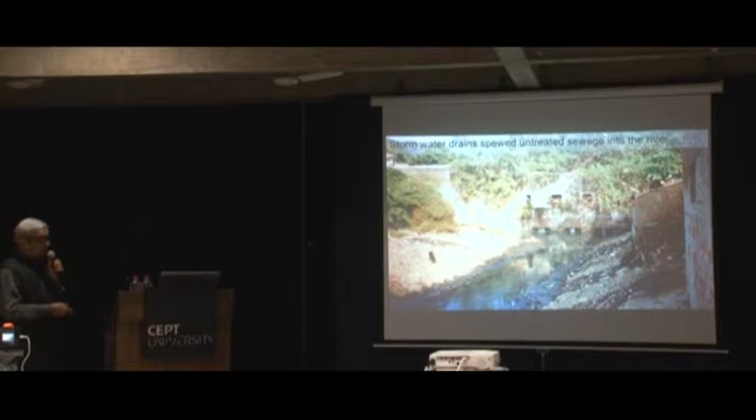You will see that the river banks are a place where the poor built their hutments along stormwater drains that brought along with the stormwater a lot of untreated sewage flowing down. The only places where people could enjoy the river from were the bridges, and in summer, a lot of people would promenade up and down the bridges, since that's the only place from which you could enjoy the expanse of the river.

By the end of the 20th century, the city had turned its back completely to the river. Here's a view of the riverfront the way it was. You have lots of activity, slums, washing, dyeing, a lot of sewage in the river. A bit of a mess here because of all that, and this is an artist's impression of the state.

Most Indian rivers are encroached upon by houses that poor people build and slums. Most Indian rivers are polluted, where industrial effluent is often put directly into rivers.

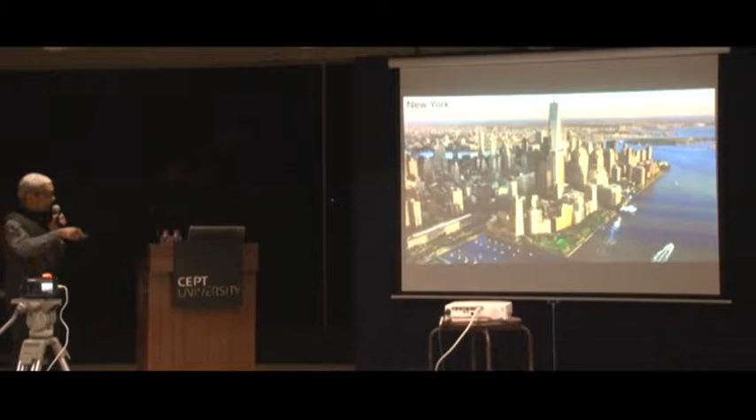But it has gardens like this along the way. Here's another view - you walk all along this and find lovely spots like this in the middle of the city where you can walk and quietly enjoy the sunset across the river. So that's a view from New York.

So it's not just the rich countries - we have our own Marine Drive in Mumbai, a fantastic waterfront. What would Mumbai be without that sort of waterfront? But what's important to remember is that these waterfronts did not always exist. Infrastructure was built, rivers were cleaned, and riverfronts were developed as meaningful public spaces.

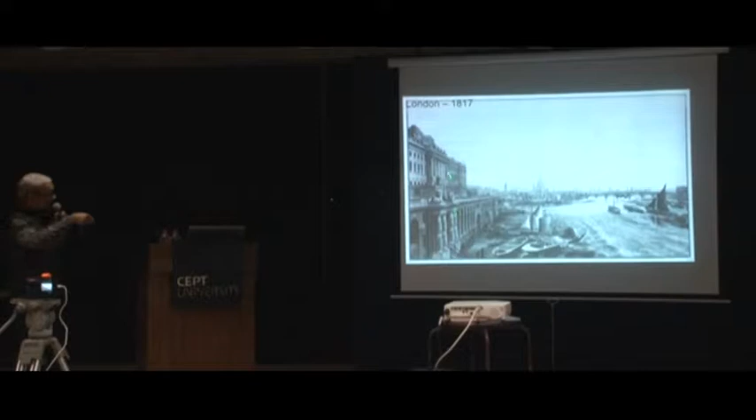You could take boats all the way in here, and the buildings used to be built so you could take boats directly in there. That's another view of Somerset House in 1870. By this time, London was already industrializing and starting to pollute its river.

Here's a cartoon from the 1830s, and this is what they are talking about: all the sewage coming into the river, the source of the waterworks for London polluted by all this. They used to say the water was so thick you could walk on the Thames. In 1858 the river got so polluted that they had to close down Parliament because you couldn't sit in there—the Parliament House is on the river—it was stinking so much they had to stop using it.

So this engineer called Bazalgette, who had already made plans for how some of these problems could be tackled, was pressed into action. He started building in Victorian times the interceptor sewers and the embankments that are used by London even today. Victorians were great city builders—they had these terrible cities you can read about in Charles Dickens and Karl Marx—but they started building infrastructure like this, interceptor sewers, subways and embankments, to transform their cities.

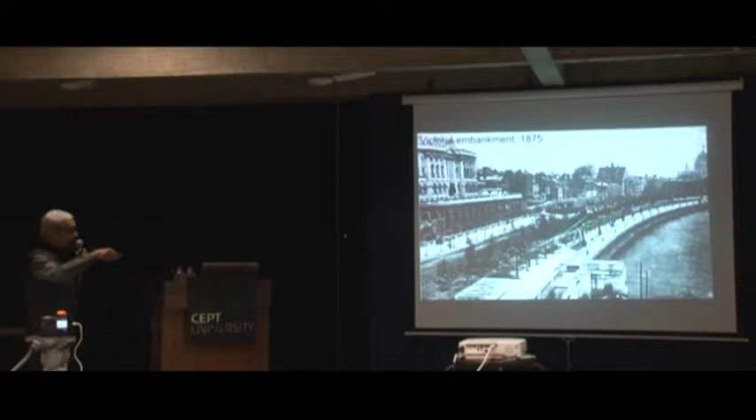Here you have Somerset House, and that's the embankment built here. Inside this embankment is an interceptor sewer that started taking the sewage away towards the treatment plant. Soon after 1875, trees started growing at Somerset House at the back there, and that's what the embankment looks like. Today, if you go to London, that's Somerset House, and that's the edge of the river at this point.

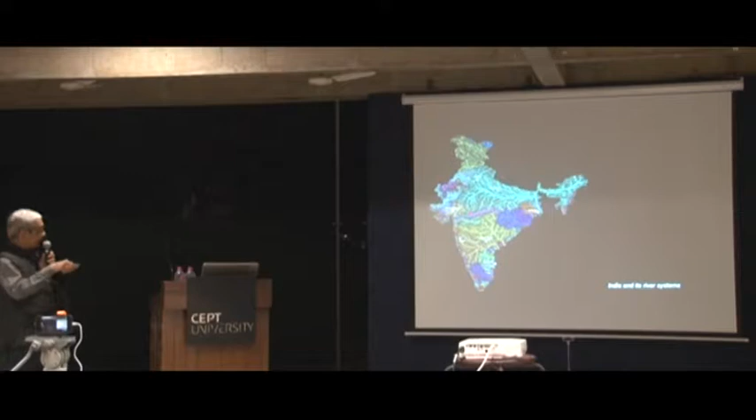That's Gujarat, and if you go a little closer, that's Gujarat, that's the Aravalli Hills, that's the Gulf of Khambhat, and that's the Sabarmati River. All the rainfall that falls in this area collects and gushes past Ahmedabad—that's the catchment area. All the rainfall in this area gushes past Ahmedabad and goes further down to empty into the Gulf of Khambhat.

In monsoon, Ahmedabad used to get severe floods—that's the 1973 flood. You can see the Nehru Bridge here, the State Bank building, the Apna Bazaar building, the Central Bank building, and the water was that high.

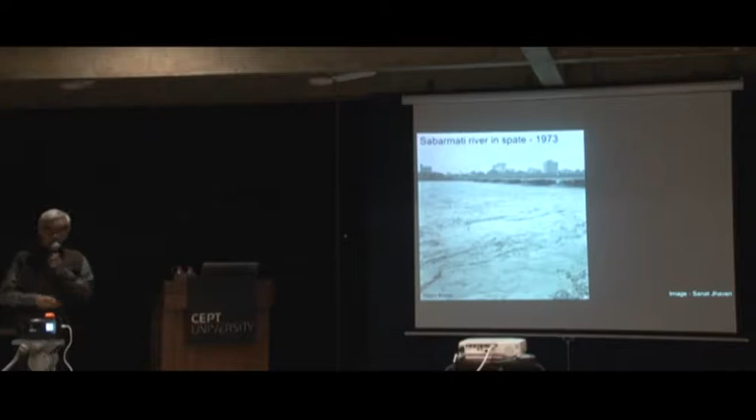Ahmedabad was really scared at that time, and Ahmedabad and the state government came together to build this important dam called Dharoi Dam, and subsequently two other dams were built on other rivers. So the entire catchment area here was brought under control. It was essentially a flood control project, also meant to provide some irrigation and drinking water needs downstream.

But once these dams were built, there has been nothing but controlled flow—no natural flood in the Sabarmati. Whatever water comes here, for example in 2006 you can see a lot of water, all of it comes through when the dam gate is open. So now there is no natural flooding, only flooding when the dam gates are open.

At the same time as the dams were built, a barrage was built downstream. A barrage is a shallow structure, a shallow dam, with gates that open upwards. In a dam, the water flows from the top; here it's open upwards. This barrage was built as an irrigation project for the downstream areas.

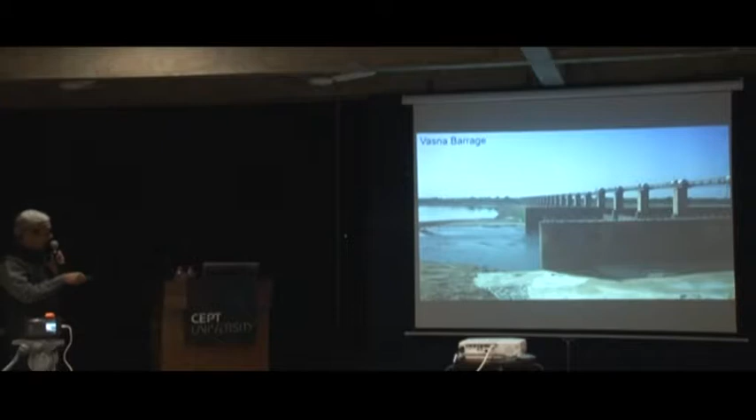And this canal here, you can see the Fatehwadi Canal—that's the canal the barrage provided water to. So that's what the barrage looks like, and you can see it's a very shallow wall, and it impounds water in the Sabarmati downstream of Ahmedabad.

On account of this barrage, after the monsoon since '76, there was water stored in the river, and Ahmedabad had a temporary linear lake in the middle of the city. Because all this water got used up for irrigation, the river bed would once again become empty like this and be given over to activities of this sort. This is the dry river bed.

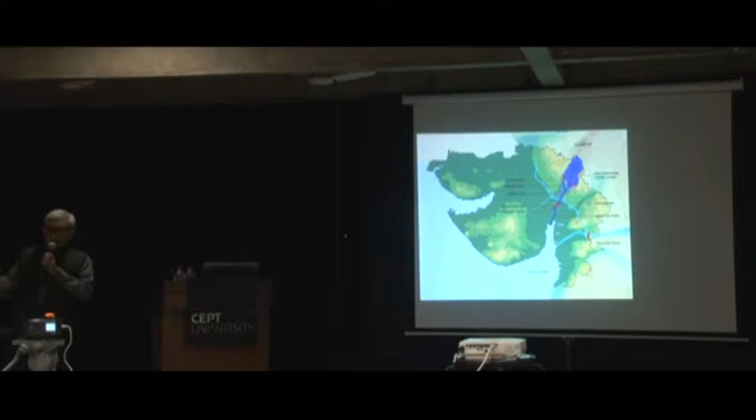Then something important happened. The Narmada Dam was built, and a canal was built from the Narmada Dam, which went all the way just upstream of Ahmedabad and went to North Gujarat and to Saurashtra. When such canals are built, to drain the canal in case of some calamity, they always provide some escape into natural water. So when the canal was built like this - and this is Ahmedabad as you can see here, that's the river - at this point where the canal goes below the river, on the other side an escape and a siphon were provided, because of which it became possible to take water from the canal and put it into the river.

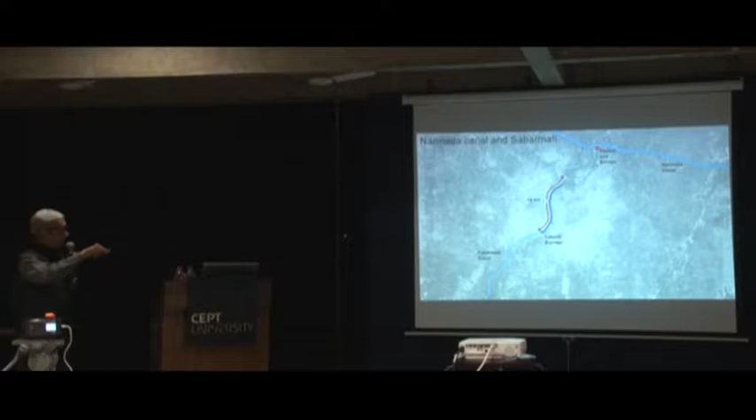Now Ahmedabad had the possibility of having a perennial linear lake in the middle of the city. So this became the barrage here, and water - remember that the river slopes down from here to here. Once you build a wall here, because it's a sloping bottom, the water has a flat surface. Here there is a deep end, here's the shallow end, and after that if you were to fill in more water, it would just flow over. But you have a 15-kilometer long lake in the middle of the city.

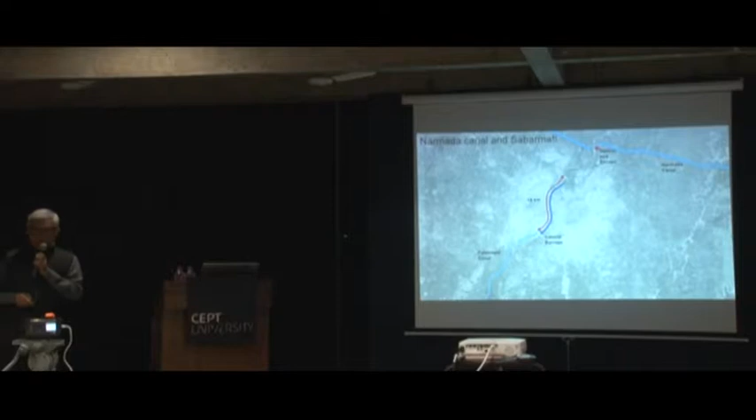Now that's your perennial lake in the middle of the city. Remember that this is a dry landscape, and the natural impulse in this landscape has been to build lakes. Every village had its tank, and many of the Muslim kings of Ahmedabad built lakes for the city. So your Kankaria, your Sarkhej Talab - building lakes of this sort is a standard practice here. You store water in the monsoon and then use it the year around.

And in some sense, this is Sarkhej. You can see Kankaria here. And now we had, in a large city like this, a big lake in the middle of the city. Remember that none of this was done for Ahmedabad city. All of this happened as a consequence of flood control, irrigation projects, and various other such things.

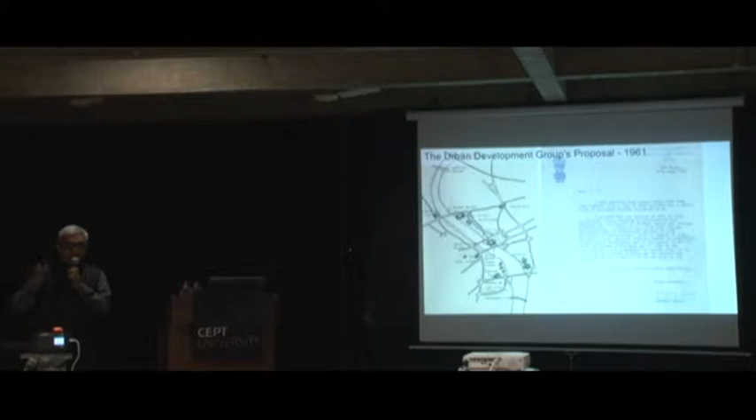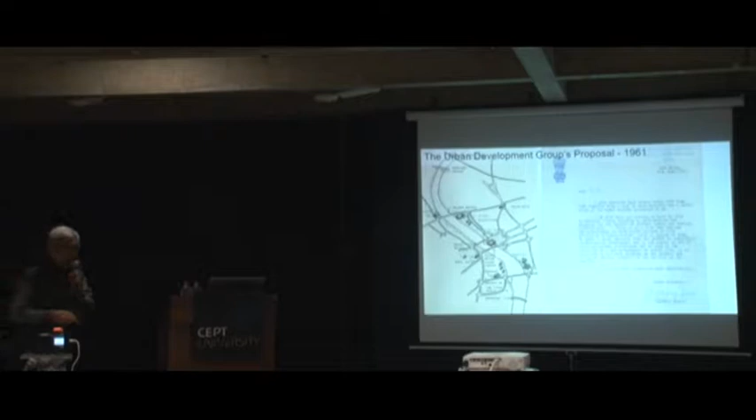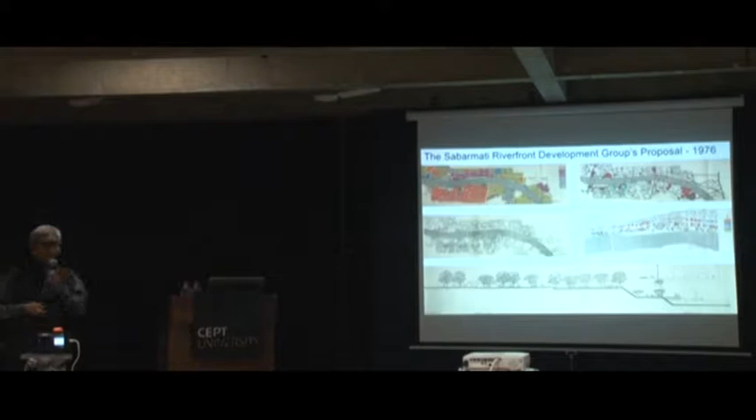And there was a lot of talk about doing something with the riverfront. Nothing came about because the time was just not right. Then Ahmedabad revived in the early 90s.

This is very important. It revived economically, and its local government institutions were revived by some really capable leadership at that time. A number of early projects were taken up, for example the CG Road redevelopment, in which I was involved, and the BRTS. This was also started off in the early 90s.

At that same time, in 1997, the municipal corporation decided to set up a riverfront development company, and it is 100% owned by the municipal corporation.

I've been involved in the project since its first conceptualization, where everything was looked at, from physical features of the river to river hydraulics. Designing an intervention of this sort requires looking at many different things: land reclamation, embankments, land ownership, water retention, groundwater recharge infrastructure, slums, costs, revenues, lots of different things that we looked at.

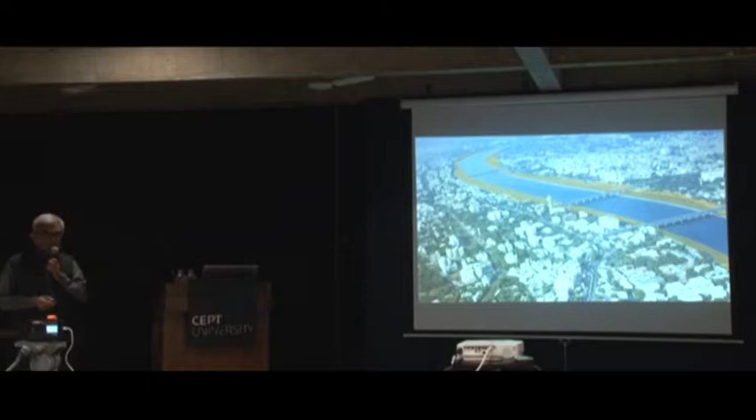The first objective, of course, was to make the river accessible to everyone. Over time, the entire edge of the river had become private, and it was impossible to walk along the edge of the river. So to create a public realm along the length of the river, what was decided was to build parallel embankments and reclaim land from the river. It's not possible to tear down the buildings on both sides, but if one remodeled the river, it was possible to get a sliver of land on both sides.

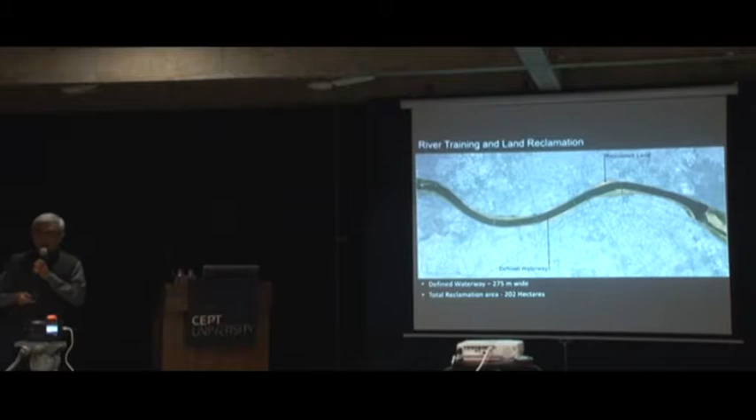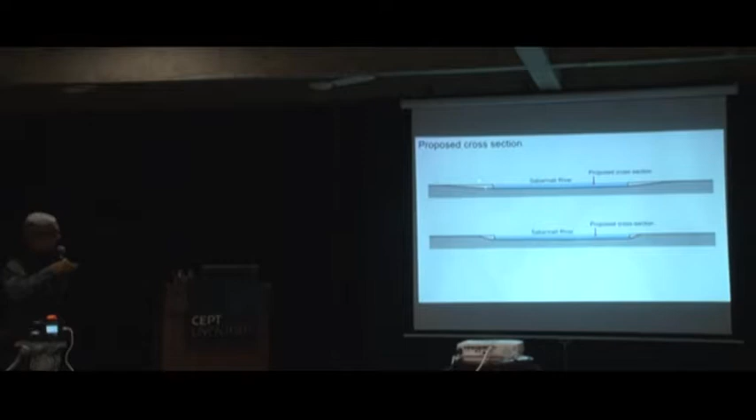You can see here, that's the bed of the river. Some places it is wide, some places it is quite narrow. All of this is historical because of erosion. The city has been built up on both sides, and now it's not eroding, but it's not fully eroded either. A number of studies said that a 275-meter waterway would be sufficient to let the flood pass through, so the natural water carrying capacity of the river would remain unchanged if it was narrow in this manner. So some places where the river was wide, some places it was narrow, and if the embankments were big, some places you would get a lot of land, some places very little.

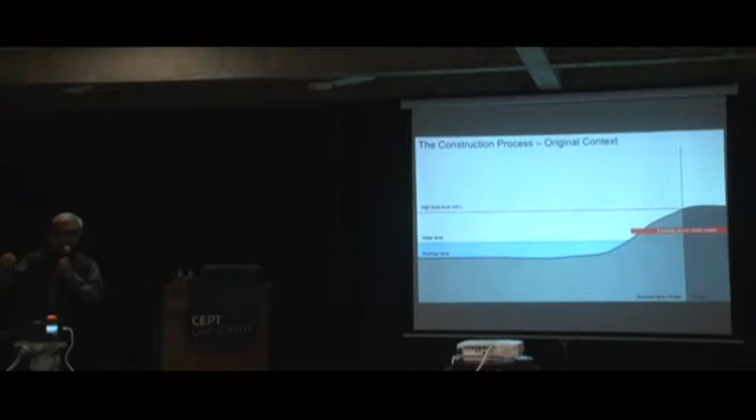So this section explains that same idea. That's the bank of the river, you can see here. This is the high flood level. When the flood comes, water comes up to this level. That's the water impounded by the barrage. Near the barrage, the water is deep; at the other end it is shallow. So this is like an average water level. This is the bed of the river, which is sandy.

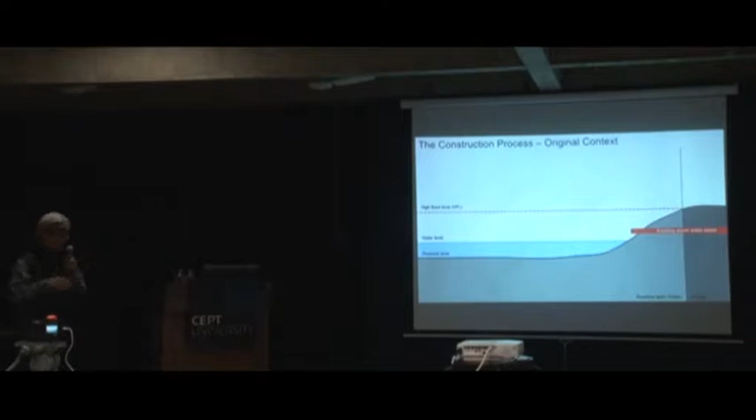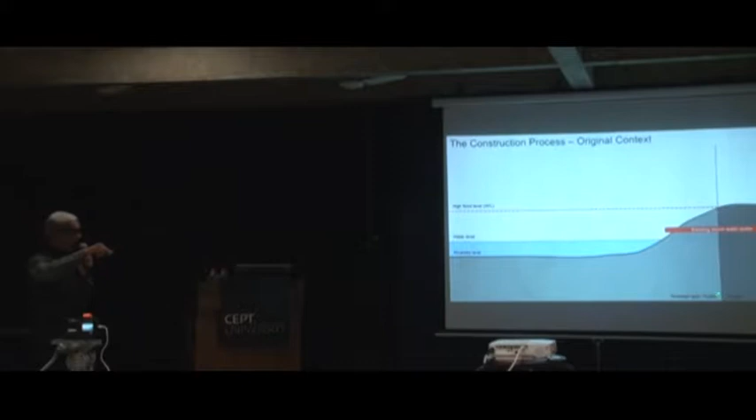This is the stormwater drain through which there is sewage coming into the river. And this line here is important. This is public land, and that is privately owned land. That's an abstract sort of diagram for the thing.

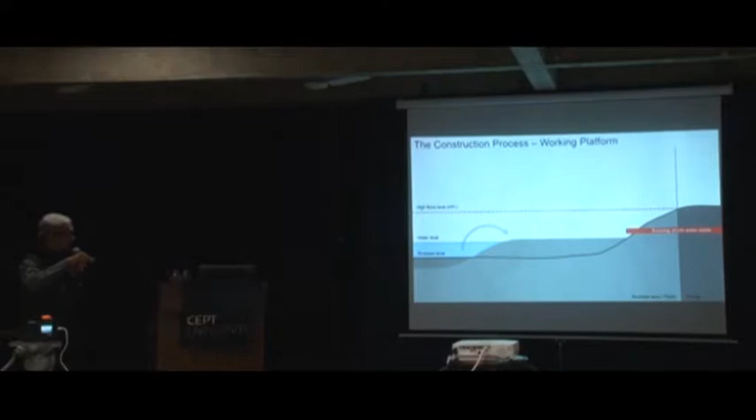The first thing that had to be done was to take sand, mud from the bed of the river, put it here, and make a construction platform that is just about 2 or 3 feet, 2 feet above the level of the water. That's not very complicated work, actually.

Why 10 meters below? Because imagine that this is all flooded. This is the sand. That's the level up to which the scour occurs. And so the wall has to go below that.

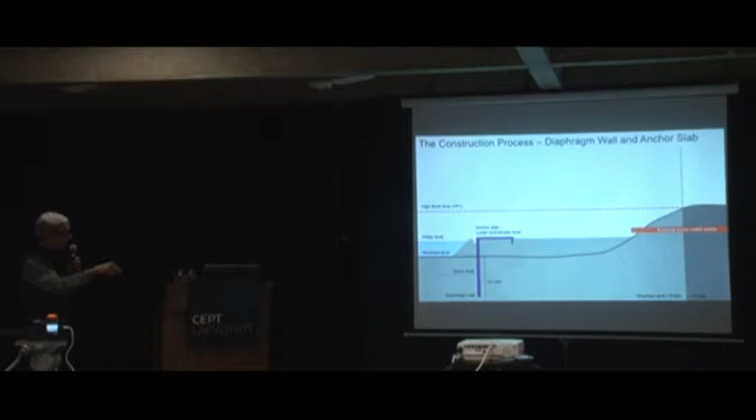See, when this wall gets covered, the sand here will push this wall out. And this is the anchor, the concrete anchor that anchors the wall back. And here it's pitched in the good soil at the bottom.

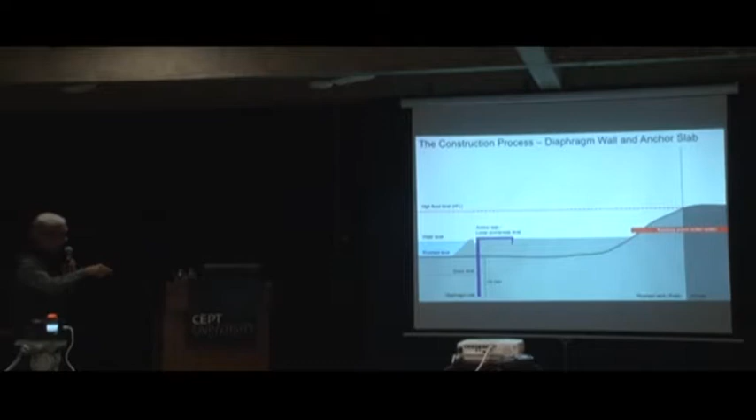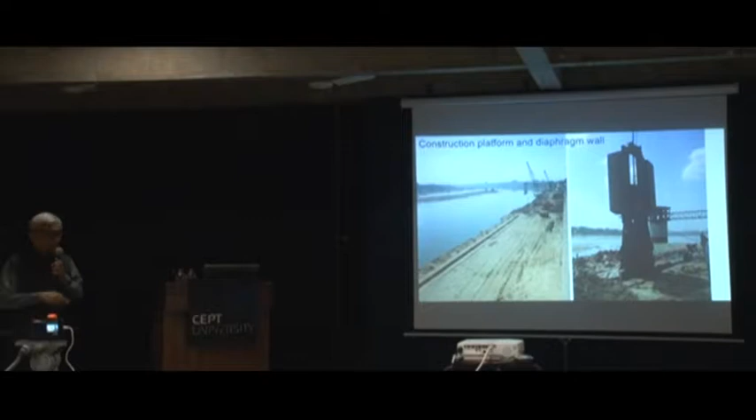So that's pretty simple, it's not very complicated work. That's trenches being dug in the construction platform. Heavy machinery, but not very complicated. And that's the trench being dug here.

That's still the construction platform being done. Then there's concrete poured here and the slab is built all across up to this point. You can see here, that's the wall below, and the slab built all across. That's the water impounded at the level, so that's the low level.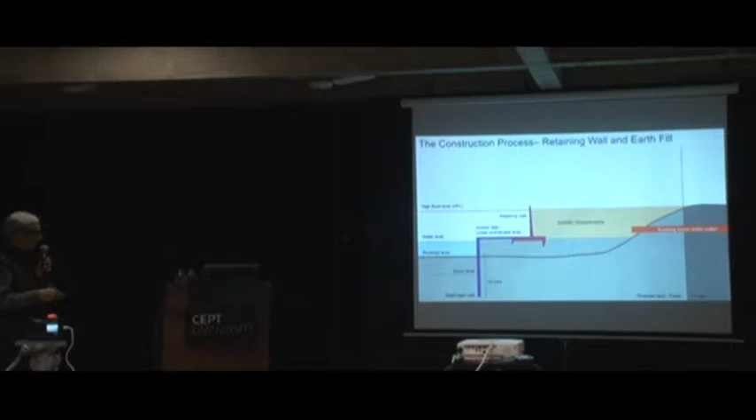Now what you have to do is build a wall that goes up to the high flood level and fill soil here to create new land at a higher level. So that's the retaining wall being built, around 2006 I think. Once again, not very complicated - local contractors building up the concrete wall.

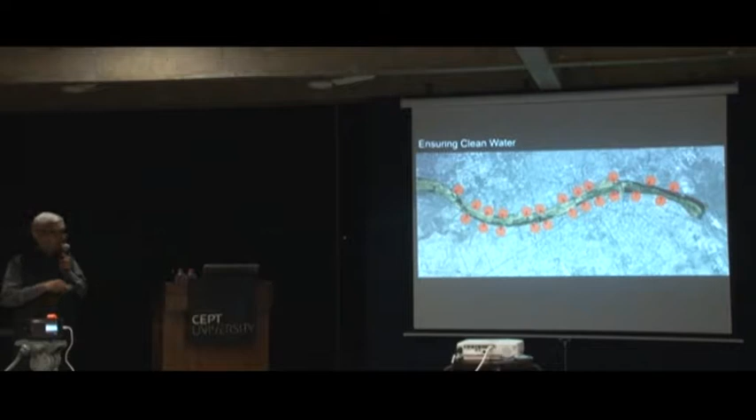It's not possible to stop the sewage from coming in, because to do that you'd have to change the entire sewage network of Ahmedabad. What's done here is an interceptor sewer that collects all the sewage on both sides from all these outfalls and takes it to the two sewage treatment plants located downstream of Ahmedabad.

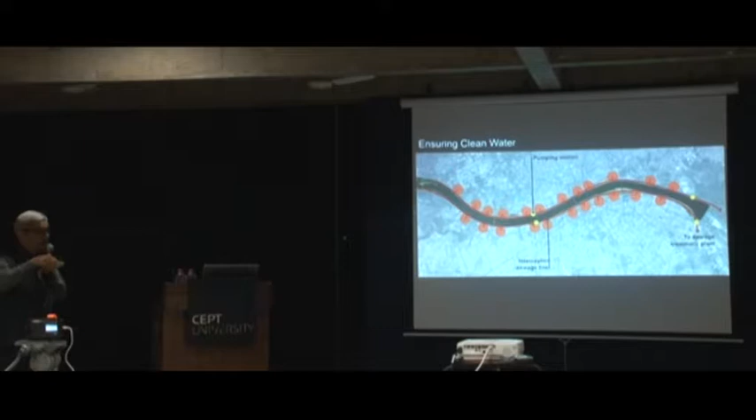So that's the two sewage treatment plants which already existed, and they had to be augmented. The sewage is all piped up to these two sewage treatment plants, and these are two pumping stations that were built to take the sewage along.

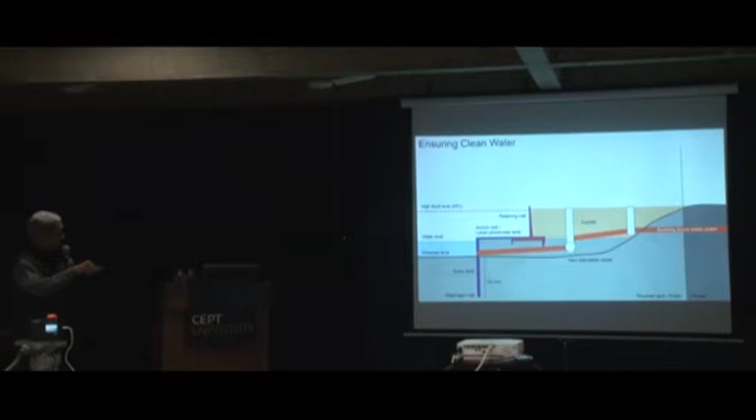That's also not very complicated work. You can see that's the sewage pipe embedded in the ground, and that's the stormwater drain coming here. The trickle of sewage falls in here and is taken downstream, and in the monsoon, when there is stormwater, it goes straight in, and the sewage is diluted by the stormwater. That's the pipe being laid.

And the flow of sewage into the river has stopped more or less completely. There's a couple of places where the work is still pending, but it's completely stopped. So now there is no direct sewage flowing back.

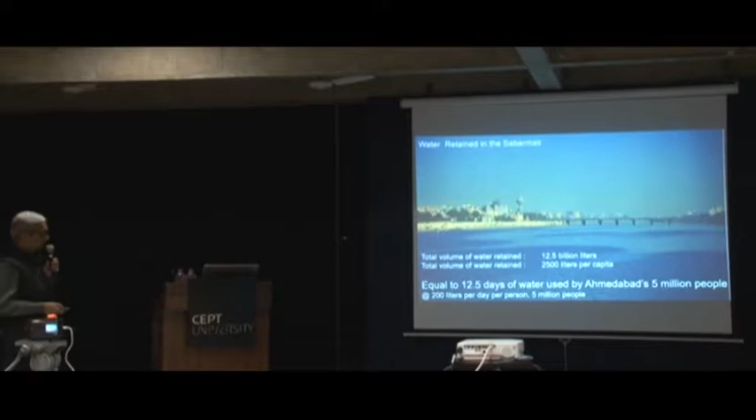The third objective was to recharge groundwater. Ahmedabad uses a lot of water, and most of the water on the western side and on the eastern side is pumped out of the ground. Now, if you take the water that is impounded by this linear lake in the middle of the city, it amounts to 12.5 billion liters of water - that's what is held in there. That's equivalent to 12.5 days of water used by Ahmedabad's 5 million people, since 5 million people use water every day, and that's what it needs to fill up this lake.

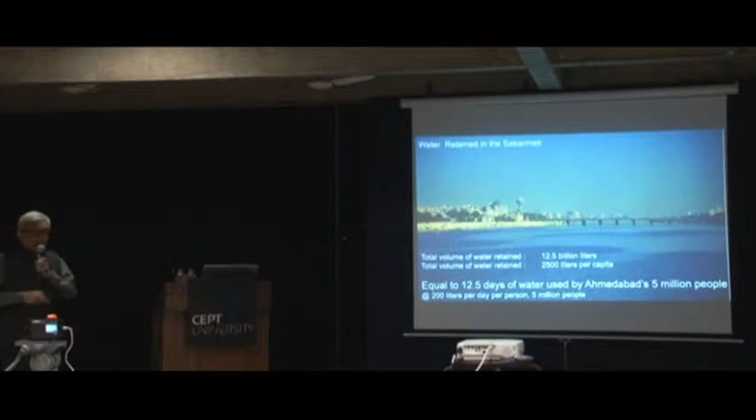Once it's filled up, there is a loss on account of evaporation, and a loss on account of seepage. Evaporation is because of the heat - you can see here 10 million liters per day on the hottest days. And 900 million liters of water seeps into the ground because of the sandy bed that the river has.

Now this seepage is very good news, because the rest of the city is pumping water out the other side. So if you want to keep the lake full at all times, every day you need to put in 1,000 million liters of water per day.

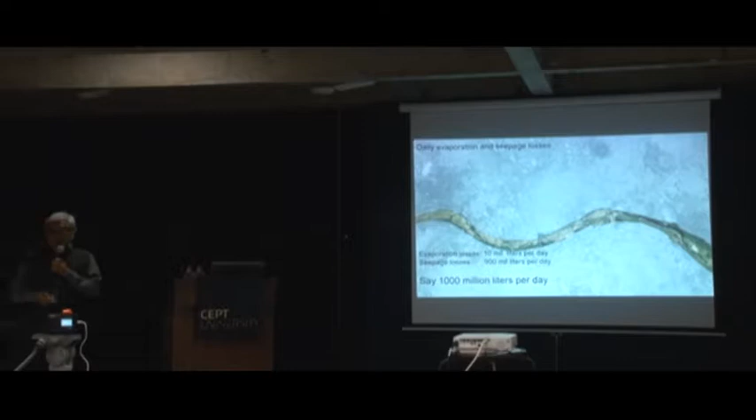Presently, this water comes from the Narmada Canal. The Narmada Canal provides water to put in. But the long-term plan is a little different.

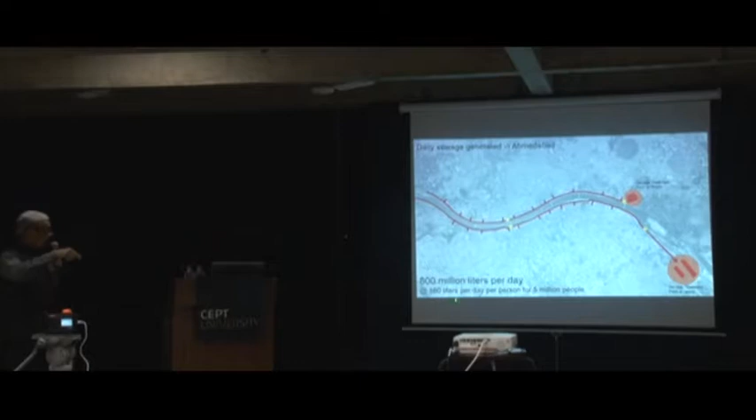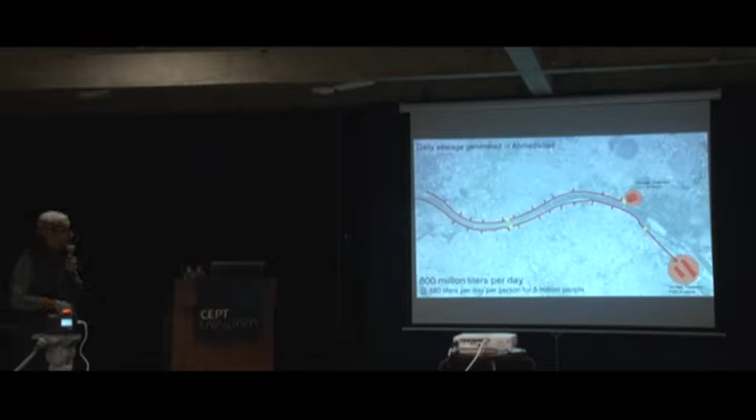Actually, Ahmedabad generates 800 million liters per day of sewage. If this sewage is treated to a good level, and instead of throwing the sewage downstream of us, if you were to put it back in, then this whole project becomes a grand recharge project.

What you really are doing is all of Ahmedabad is pumping water, gets water from further afield, also pumping water from the ground up, uses it, turns it into sewage, treats the sewage, puts it back into the riverbed, and that seeps down into the ground. So that's the long-term plan.

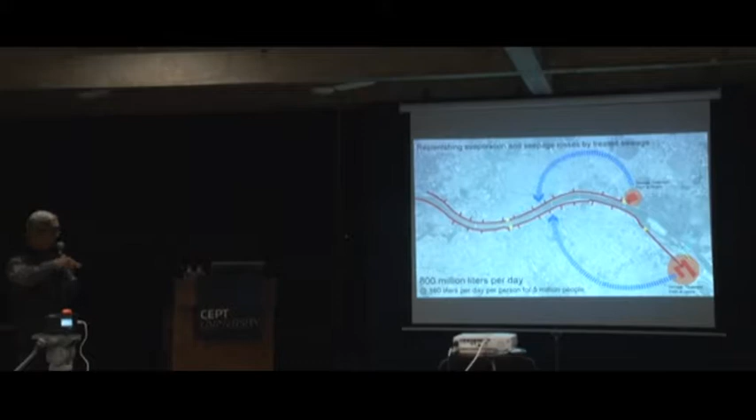Of course, not all the treated sewage water will come from these two plants. AMC is already building a decentralized plant here, so that water from the Shahpur Gate, Dafnala that comes in will be treated and put directly back into the river. So that becomes the recharge of the river.

So it's not as if Ahmedabad will be dependent on Narmada forever. Presently, Narmada water is available, so they use it. But eventually, this is how the lake stays full.

And of course the people don't have tenure, so they're on constant threat of eviction, or have to deal with the slumlords who manage the rental market in the slums.

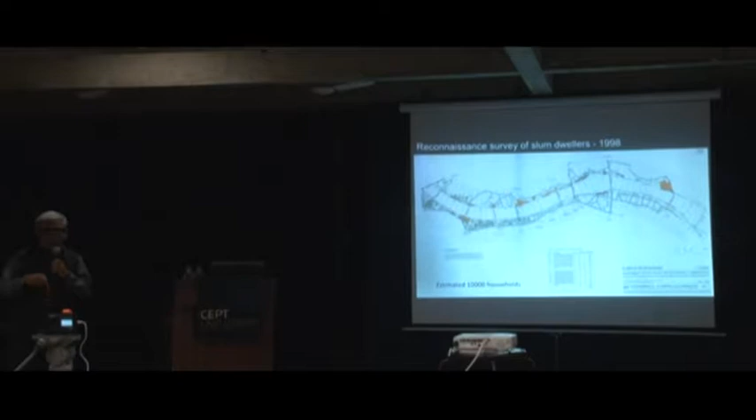And within the project area, which is the riverbed, there were 10,000 households that were estimated to be in the project area. Because some of the slums went deep into the city and then came on the back, overall in these slums there might be a little more, but in the project area there were 10,000 households.

Subsequently in 1999, an extremely detailed socio-economic survey was done, and every family was met with to find out different aspects about their life. This survey finally told us that there are approximately 11,000 households, not 10,000.

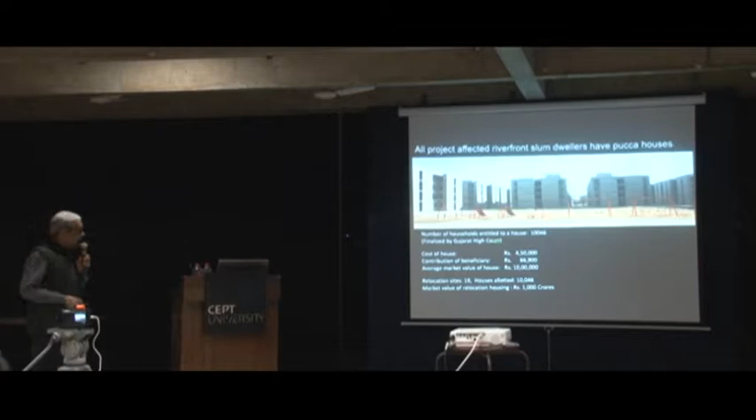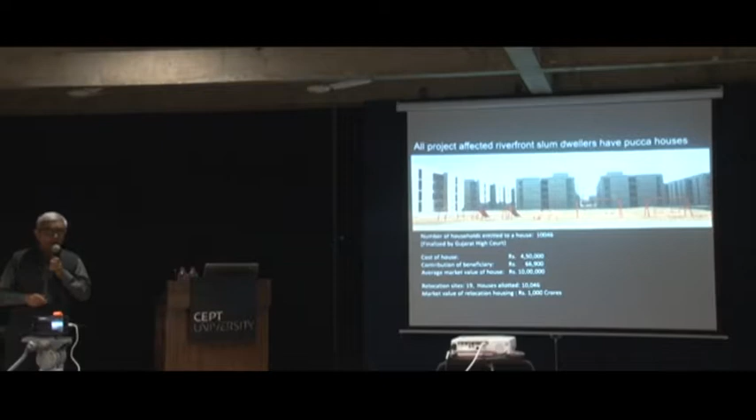And the housing colonies look like this here. The cost of individual houses was 4,50,000 rupees at that time. The beneficiaries paid 66,900. And if you consider the land value, the market value of each house was 10 lakh rupees - 6 lakh rupees for the land, and the rest of it.

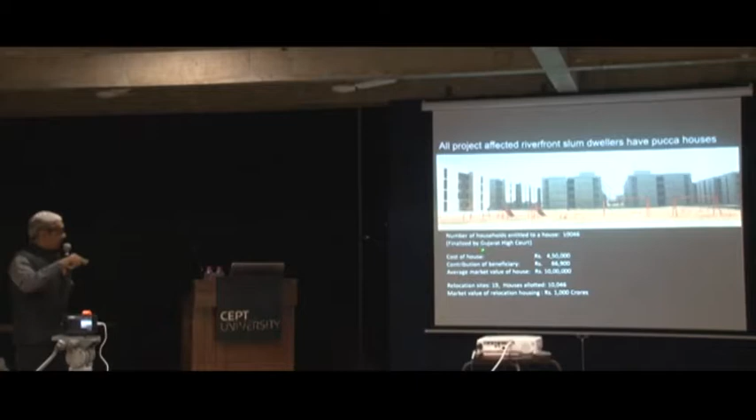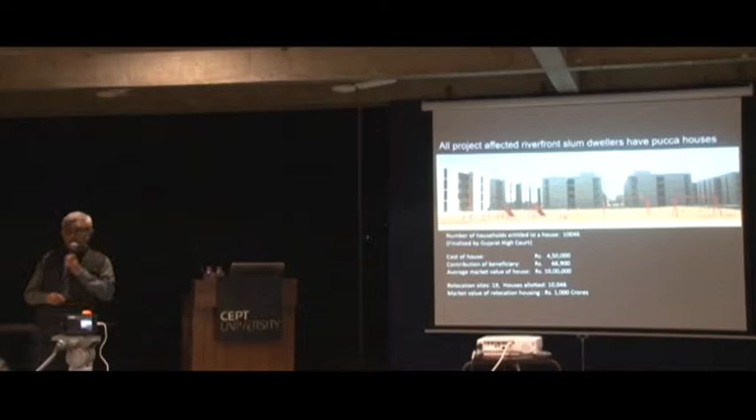So in 19 relocation sites, eventually 10,046 houses were allotted, and the market value of this sort of housing that was provided was 1,000 crores. Just keep that number in mind because I'm going to talk about it later.

I think the design could have been much better, but that's the way the housing came out. And many of the people's lives have improved significantly after that, and you can find many happy scenes.

There are also many places where the housing colonies have not worked out as well, and they're not in good condition. There's lots of crime in these places, but not all of them, definitely.

So this project, in a sense, has created housing for 11,000 slum dwellers for now.

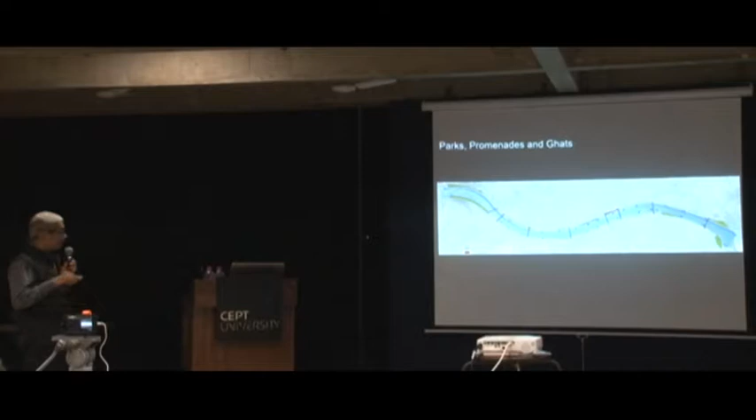But to imagine what this place would be, this drawing was done. It shows a long park here—that's the lower promenade, that's Patang Restaurant. That's an imagination of what life would be like in this place.

In this place, there's no wall—only the fourth wall, and you see the steps coming down. That's like what the place could be.

Here, when the wall was being built, there were trees coming up, and you can visualize that. That's the rendering showing the trees and a marathon happening here. And here's where the sample stretch was done—the trees haven't grown yet, but someday they will, and in the shade this will be a quiet place.

And here, with a temple, you'll have a Ganesh Visarjan, which is already happening in this area. And that's Gandhi Ashram—an imagination of what it could be once the water is clean and the trees have grown, with the Gandhi Ashram steps. You can see there's a big, massive gate stopping people from entering Gandhi Ashram from the river. Someday these gates will go, and this will be a place.

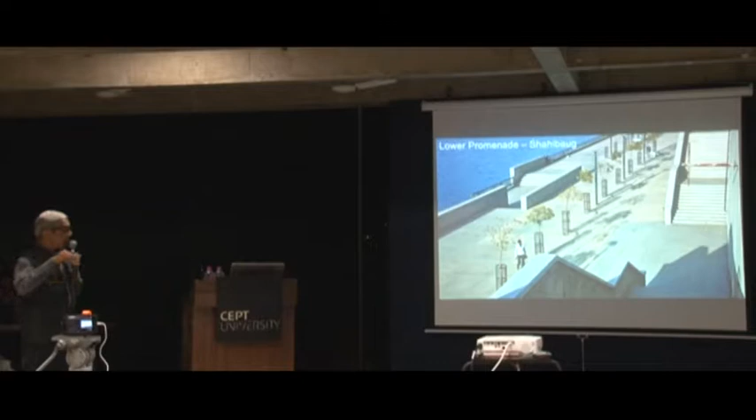And of course, many of these places are already in place. That was in 2012, when the first trees were planted and the sample stretch was opened up. People would come and discover a spot like this and suddenly say, oh my God, that's a lovely place. This was the first stretch which was opened up, also a picture from 2012—people coming here, discovering the place, enjoying the water.

Here's the Kite Festival in 2012. And the newspaper reports, once again from 2012, talk about people enjoying the riverfront in the monsoon. And here's another one—people boating, with lots of young people finding this a quiet place where they enjoy themselves and meet each other.

This is certainly not the place where the richest people come, really where the poor people come. It's public space where people come. You can see here there are different sorts of people - many of the elite also go there for jogging and running, and there's also other poor people, different communities mixed together. That's what the spot is. There's boating, and people come there for exercises, taking walks. And this woman here says that she comes here to study - I don't really believe that.

There's a family going out for a walk. So what used to be a bed like this - that's Reserve Bank here, that's Patang Restaurant - and you can see that that's what that's become. Slowly as the park is developing.

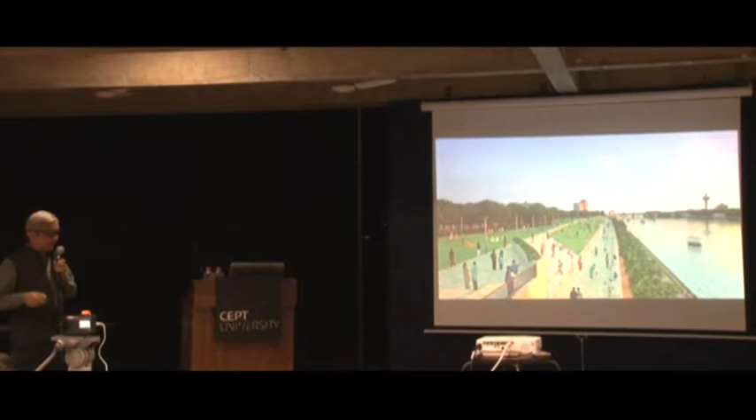There's a park that has been planned in Khanpur. This is Cama Hotel here, and that's about 1 kilometer long. And that's a park that, once done, will look like this - you can sit on this grassy bank here and watch the sunset on the other side. So you can see here 1 million square meters of

parks, promenades, and ghats have been added to Ahmedabad. Then the idea is also to create cultural, trade, and social benefit. Here in this place, you have this concentration of the trade fair complex. This is still to be built, it's coming up. I'll just show you.

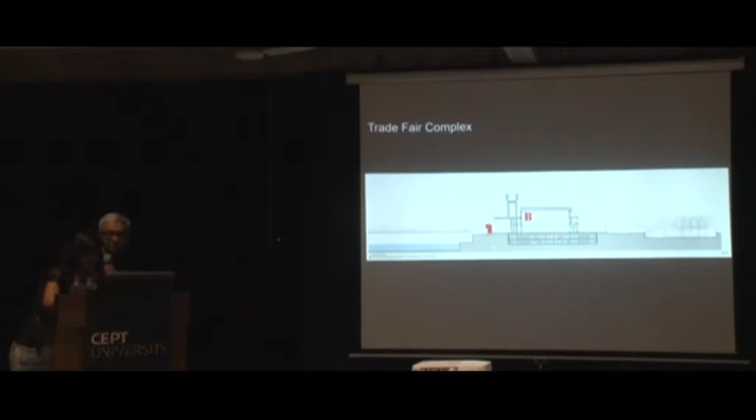Okay, that's a trade fair facility. You can see that's a section of a large exhibition hall along the river, and that's the length of the exhibition facility here. Seems to be some problem. Okay, so that's a trade fair facility, and that's a view of the trade fair facility that we created. On the other side of the trade fair facility is the riverfront.

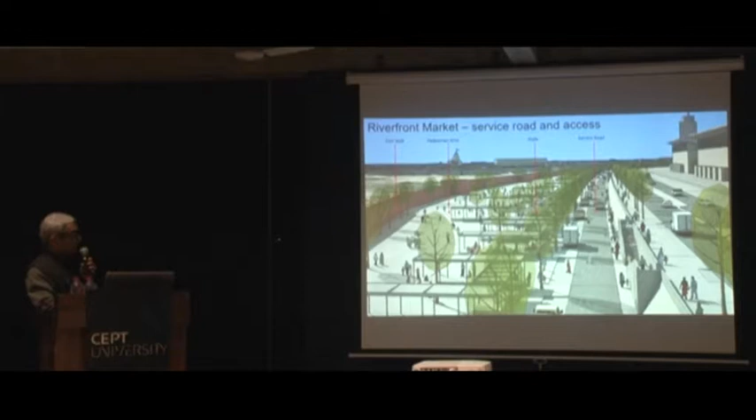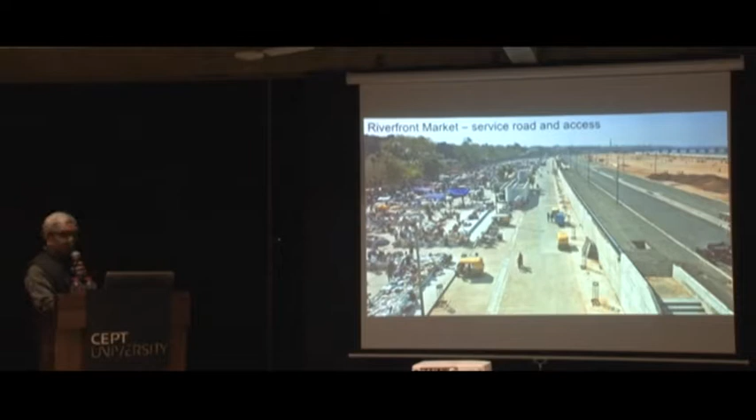The entire end along the fort wall is now the Sunday market. That's the visualization of the Sunday market - you see the fort wall on the other side, trade fair facility on the right hand side. And that's the Sunday market as it takes place today, a huge flea market, 4 or 5 times the size of the original one. You see that's where lots of trees have been planted - at some point it's been completely shaded, and that was the visualization. That's what it looks like. There are lots of umbrellas being used right now, but eventually it will be completely shaded by trees.

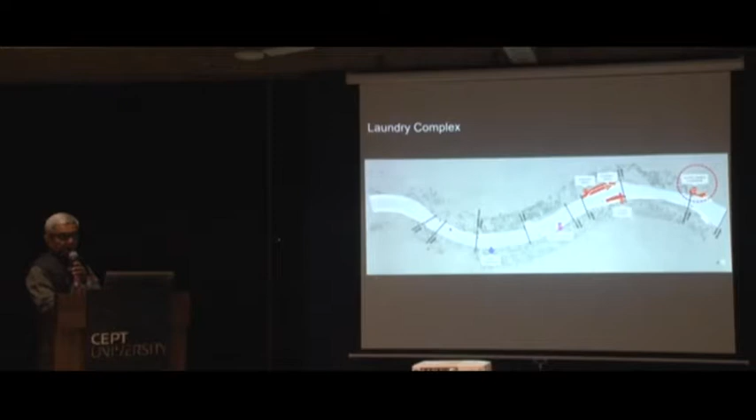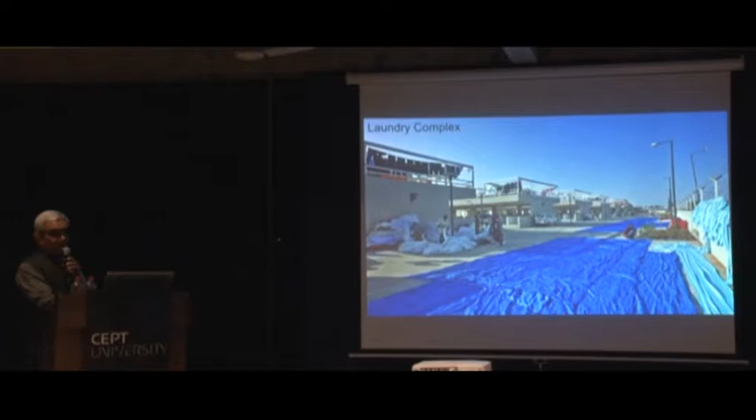At the far end here is a laundry campus, a place where the dhobis on the riverbed have found new facilities. From the riverbed, they were relocated. Trade and social amenities - this open land is now used extensively by the city.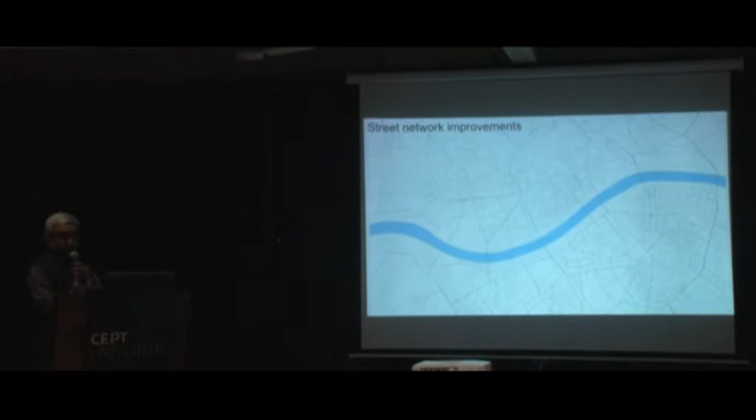The project is already spurring development of adjacent areas by adding new buildings. Many of you might have seen how the developers on both sides are advertising their buildings with riverfront views. The ninth objective was to improve Ahmedabad's street network - you look at the street network of Ahmedabad, the north-south link, particularly to the east, was extremely poor.

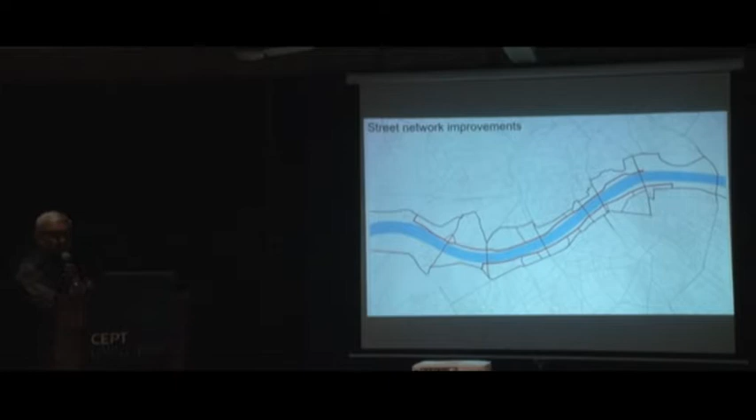You could really not go north-south, and you would have a very difficult time doing that. So some of the land here was used for providing two parallel streets on both sides, wherever possible. Wherever there was very little land, they were along the river.

They are connected now, and I was surprised to see how many people were happy that this connection was done. So that's what the streets look like along the front. Here's another one where the bridges and streets are connected. Many people who go across daily find these connections very useful.

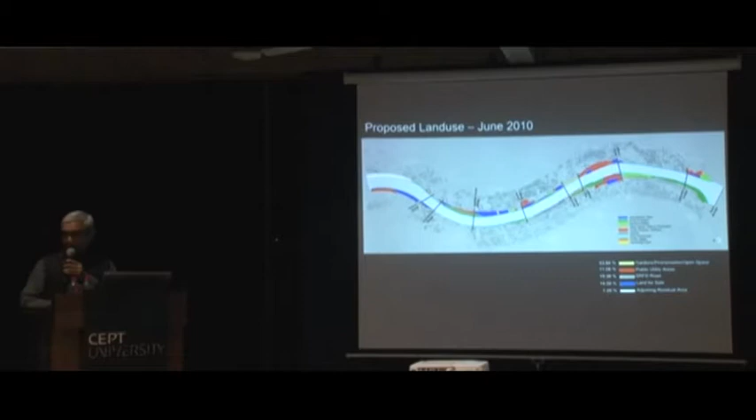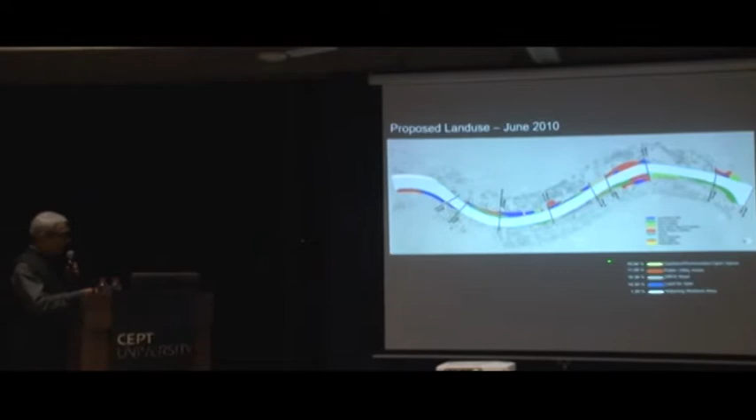The 10th objective was to pay for the riverfront development. What you have to understand is that the project is a self-financing project. The land that was created, about 53-54%, is parks, gardens, promenades and open spaces.

About 11% is for public utility areas like the trade fair, etc. You can see here, Sunday market, event grounds - that's public utility area. So about 64% of the land is used for all sorts of public spaces. 19% is for streets, and 14.5%, the blue spots, is allotted for sale. Once it's sold, this is the money that helps pay for the entire project. So it's a completely self-financing project.

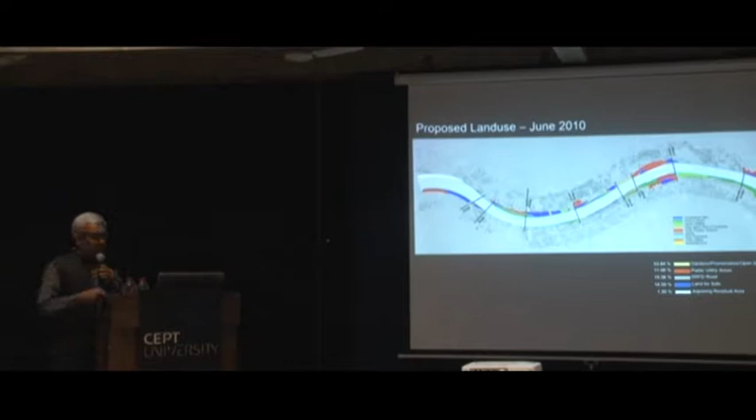So, of course, this is the land that is to be sold for new developments. There are strict urban design guidelines for what sort of buildings will come up here. That's an early model made to figure out what the buildings will look like.

Now here's some interesting information. The land to be reclaimed is 204 hectares. What is to be sold is 29 hectares. The amount of floor space that will be built is 1 million square meters.

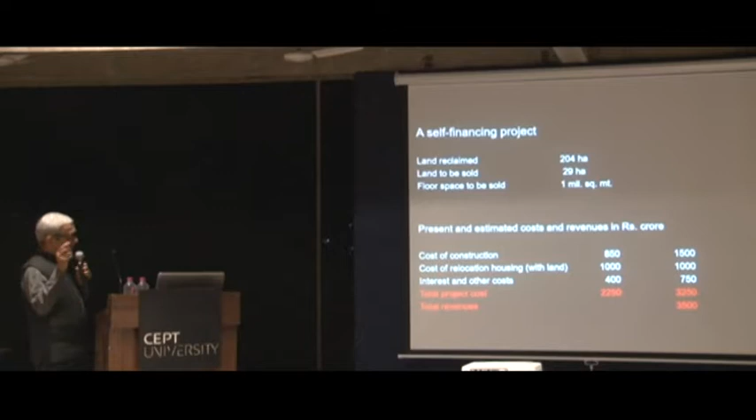All of this is just numbers. But what's important is that presently the project has cost 850 and 400 - about 1,200 crores for the project and 1,000 crores for the housing.

The entire project, including the construction cost and the interest cost together, has cost the equivalent of 2 five-star hotels. So it's really not an expensive project.

What's also interesting is that almost as much money spent on the project has been spent on the housing - 1,000 crores of housing. Together, today, about 2,250 crores have been spent on the project.

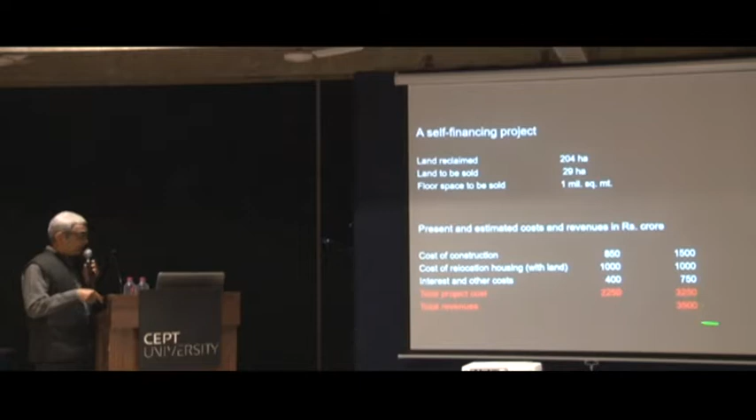When the project is complete, when all the gardens are finished and everything is done, it will cost about 3,250 crores approximately, and from the sale of land they will recover 3,500 crores. So cash profit has never been the purpose of this project.

In fact, originally 20% of the land was to be sold, but when they discovered the land would sell for more, they reduced the amount to be sold - so originally 20%, now 14%.

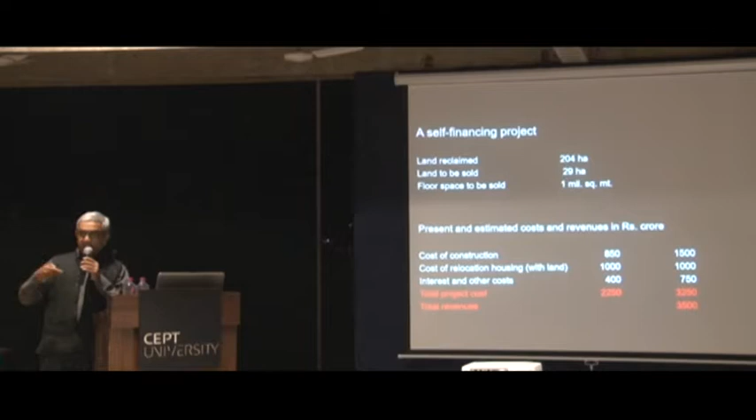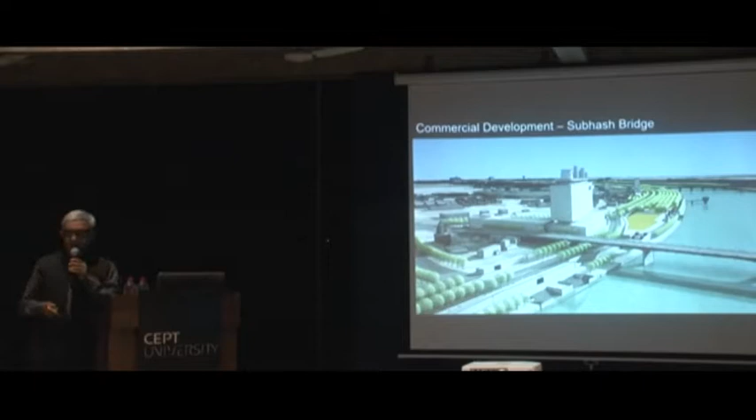That's the riverfront building that is coming up right now, and the development of the riverfront has already started. Sale of land is not happening yet.

Now, the ultimate objective of the project was multiple. The output: first was to bring Ahmedabad together around a large civic project - it's really a very fundamental thought, and you can see the project at different levels. It was also to build Ahmedabad's capacity to tackle complex urban problems. Most Indian cities, and most Indians, feel that these complex problems simply cannot be solved.

One of the objectives was to show that they can be solved, and to show that even in our spirited democracy, often very fractured, it is possible to find solutions to complex problems. So these are all the objectives.

Of course, this meant building consensus, talking about the project with people. You can see here, that's the man who actually started the project off - he's a local politician.

This must have been in '95 when the project was just being thought out, and he's explaining to a group of people from the newspaper. Endless such meetings were done to explain to the people what the project would be like. Here's me, much younger, explaining to people what the technical aspects of the project was.

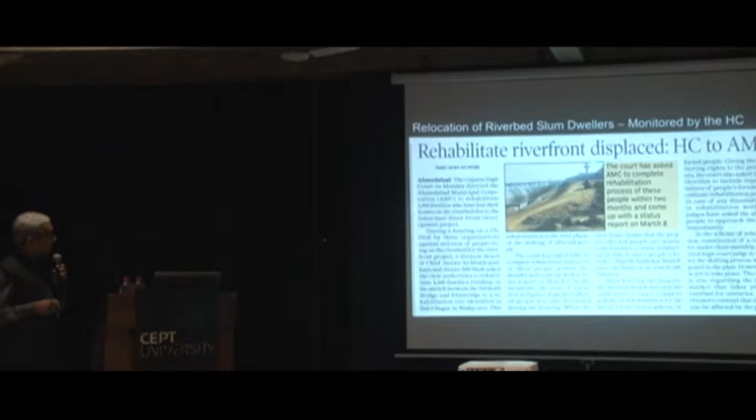Then the High Court acted very constructively, saying that we're not going to stop the project. What we're going to do is ensure that the plans are implemented, and that went on.

Then there were some people with this spurious claim that the Sabarmati Riverfront project is going to wipe out the Gujari market. This went on for a few days in the newspaper. And then the mayor and everybody had to come out there and say, no, it is always going to be there, it was going to be there.

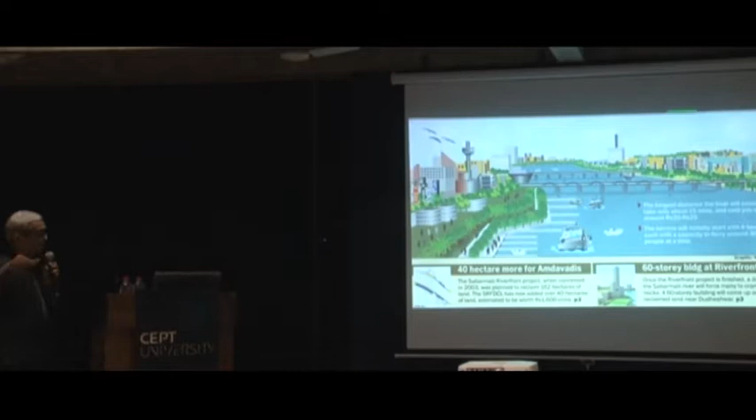Then at one point the newspapers were making such terrible illustrations of the project that we decided to make better illustrations, learn how to draw pictures and images that would speak to people. That's when we developed the techniques for doing these sort of renderings.

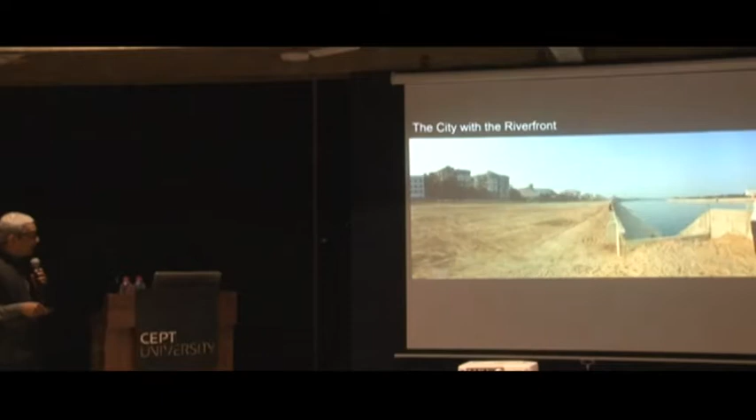That's the spot here. It's exactly at this spot what it would look like. And that's a 3D model with all sorts of fine arts people, etc. going there imagining life in the future. This is the building that's actually being built right now.

And people will come to the exhibition and ask questions like this about the project. So this project is all about bringing the Sabarmati back to Ahmedabad and Ahmedabad back to the Sabarmati. So thank you very much.

My question to you is: what was that one act, or series of acts, that you'd attribute the success of the implementation of the project to? You said that since 1961 there have been different proposals and enough effort made for this project to happen, but something triggered in 1997-98 that made it possible.

This is the question that a lot of cities ask when they come here, and people from many different cities of India come here to see the project. The key question we ask is: how was Ahmedabad able to pull it off? How was Ahmedabad able to make such a project happen? This answer can be given at three levels, I think.